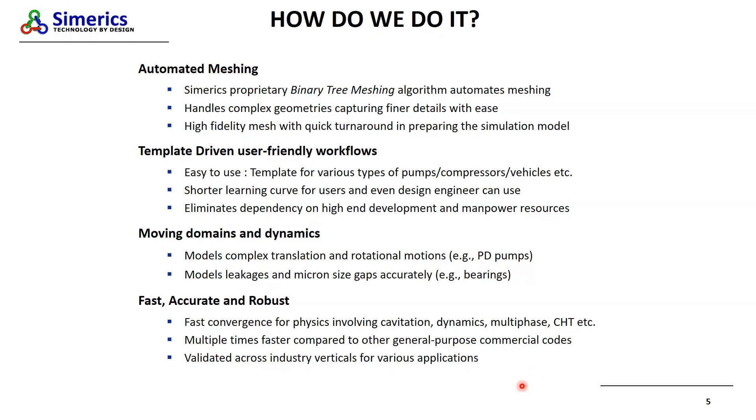On top of that, we have a fast, robust, and accurate solver. It helps in fast conservation and convergence of physics in complex physics like cavitation, multiphase, or conjugate heat transfer. This makes us multiple times faster than other general purpose CFD codes. We have also validated our tool across various different applications, which is something we will be showcasing today in our case studies.

So regarding our software suite, we have three different software suites that we are currently developing. The Simerics CFD has been a platform that has been there for a while now. The FEA platform is relatively new. We've been working on this the last several years, and we have come up with a platform that is now ready to be used. And also there is an optimization platform that is also coming up in the next release that is going to be an inbuilt in-house optimizer that is strongly coupled with our CFD software.

So we have multiple collaborations, and since the software is being utilized widely, we have been working together to make it work in those platforms as well. So now let's talk about Simerics CFD for multiphase VOF. I think volume of fluid has been there for a long time, but the commercial use of volume of fluid to track the different phases has recently been utilized in a very wide variety of applications to get commercial value.

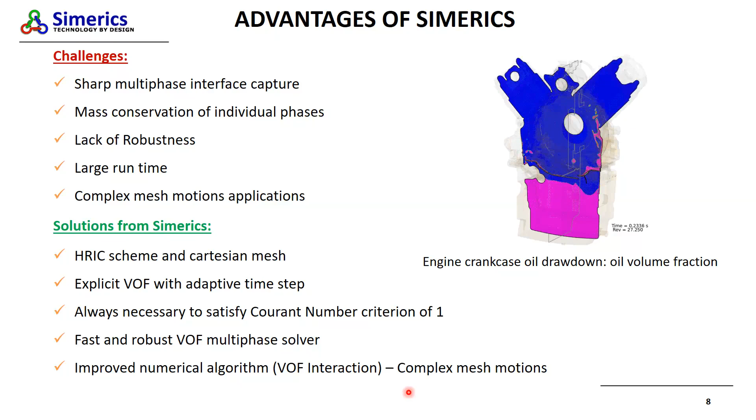This is something that some of our users have a lot of happiness involved using our software. We see that it rarely has any trouble with convergence if they follow the set of practices that we have developed and help them implement. And also for complex motions, we have improved our numerical algorithms to ensure that we can address this without any of the above being compromised.

So I'll briefly describe each one with an example. So the first one is multiphase interface capturing. So you're looking at an example of an electric motor where your shaft is spinning at very high speeds, can be about 10,000 to 20,000 RPM. And you are inputting flow, which is very low, let's say 1 to 2 LPM. And then it comes out and forms like a free stream and goes and splashes on this end ring surface. So this is a very tough combination for VOF because you have very small amount of flow coming at very high speed out of a very thin hole.

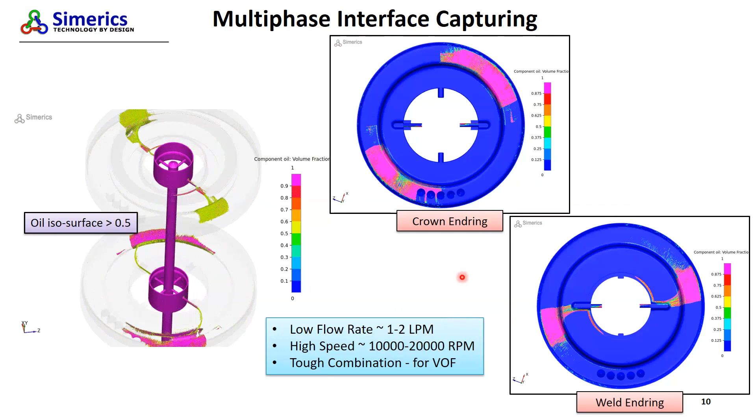And you can see the interface that we capture here is extremely sharp between the oil and the air. So it shows that a tough engineering problem in the real world can still be addressed using a software with a very reasonable time frame.

The next example is for the explicit VOF with the sub-time step. You're looking at a coolant system filling scenario. Here it's a vacuum fill process. So what it involves is initially evacuate the system to 90 kPa below atmospheric pressure, and then you're filling in coolant at atmospheric pressure at the top boundary. So initially there is a huge pressure gradient of 90 kPa that creates a velocity in the order of 200 meters per second. So there's high velocity at the beginning. And then as the system starts to fill, the velocity starts to reduce.

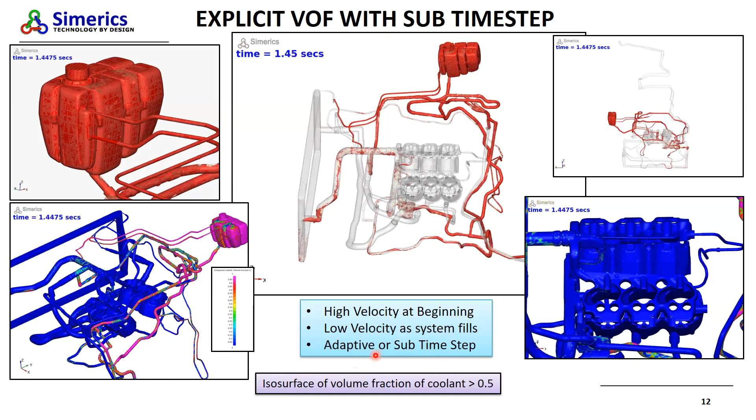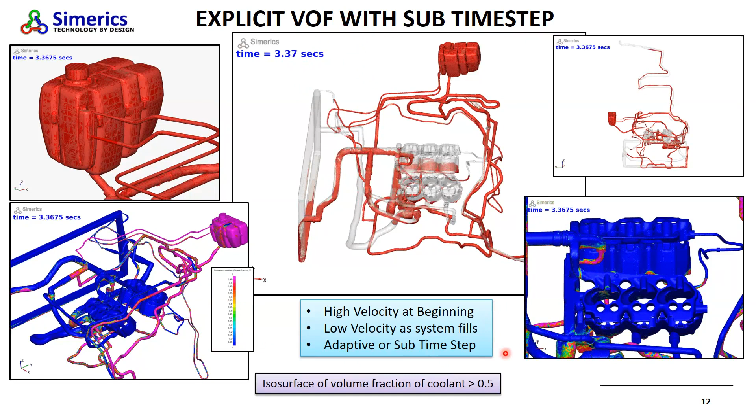In this process, you don't want to sit and manually input different time steps as you run the simulation. So we use our explicit solver with internal sub-time stepping. So it does an adaptive time step to ensure your time step is changed as a function of your Courant number. And this ensures that the interface that we capture, as you see here, between the coolant and the air is very sharp. And also you notice here that we have been running this simulation for quite a long time. We run this typically 15-20 seconds. And in order to run this within a very fast runtime, this explicit sub-time stepping can accelerate this process very fast to get results.

So the next aspect of it is conservation of individual phases. So here the coolant is a constant density, whereas the air is ideal gas law. So when it's done filling, you should get to 90% fill because this is just based on the conservation of mass. So we see that the integrated mass error that we get is within 4% after we run this for 15 seconds. And you can see that the volume starts to saturate after you run this for a while. So this kind of shows how good we can conserve mass, even though we run this for a long time and do this aggressively.

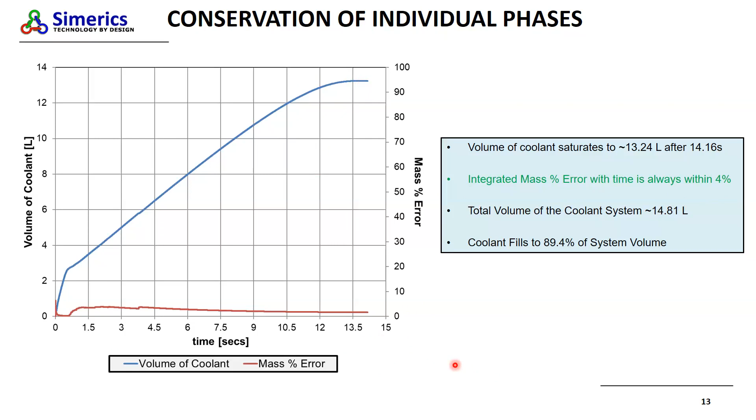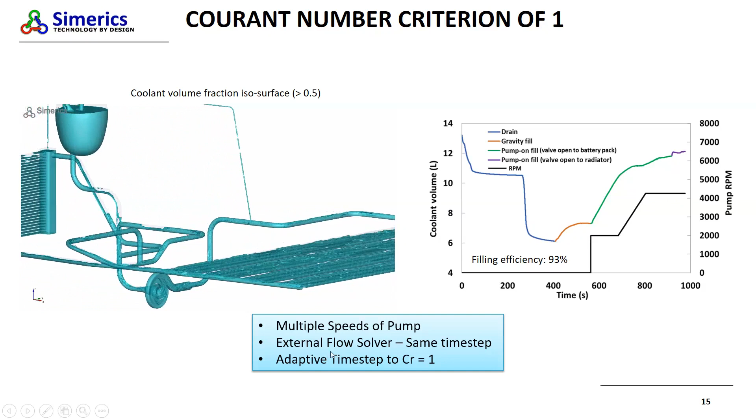So the next advantage I want to talk about is the necessity of the Courant number being 1 always being satisfied. So here you're looking at an example of coolant system fill as well, but here it's the pump-on filling. So when you run this case, initially you gravity fill it, and then you start to spin the pump. And you can see the curve here showing the different pump speeds. So you can have multiple pump speeds. Initially we start at 2000, then we ramp it up to 4000 odd and stay at that number. During these multiple speeds of the pump, we control only the external flow solver, which uses the same time step. And our adaptive time step makes sure that the Courant number 1 criteria is always satisfied. And this is automatically done by the solver.

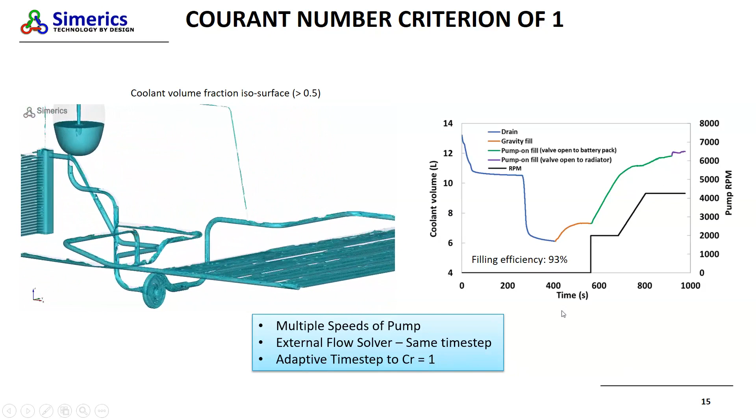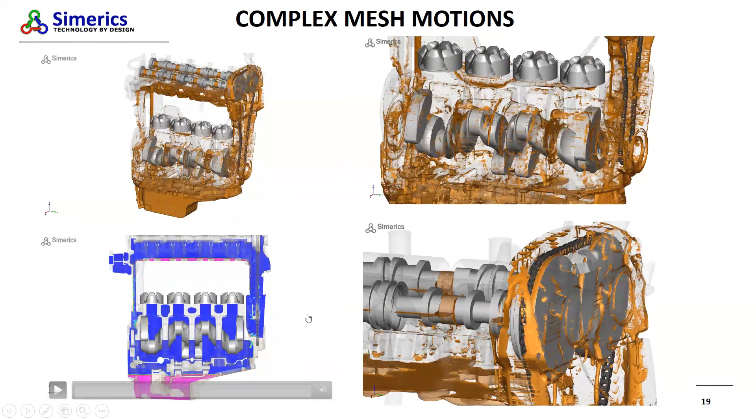And this is what ensures that our interface capturing is sharp while our mass is conserved. And the final part of it is complex mesh motion. This is an example of a crankcase drawdown model. So the piston's moving as well as the crankshaft rotating. On top of it, we have a chain that is also moving. So all this is being modeled with oil and air physics, and the rotation speed being quite high. And we can do this very effectively using our VOF tool. I'll be showing this case study a little bit more in detail later on.

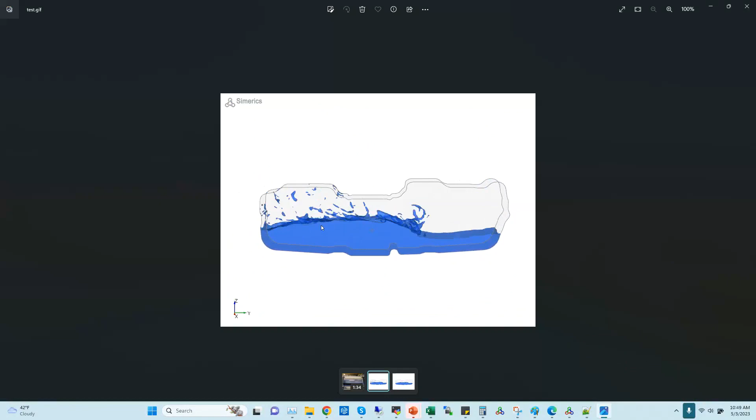Thanks, Chirant. Today, I'm going to go over how to set up a tank sloshing model in Simerics. Before we get into it, I wanted to give you an overview of the model we are going to set up. As you can see on the screen, this is the model of a tank, which is partially filled with water and the rest of it is filled with air. We are going to be displacing this tank with an oscillating motion along the y direction. The idea is to predict the flow patterns and to study the sloshing inside of the tank. So let's get into it.

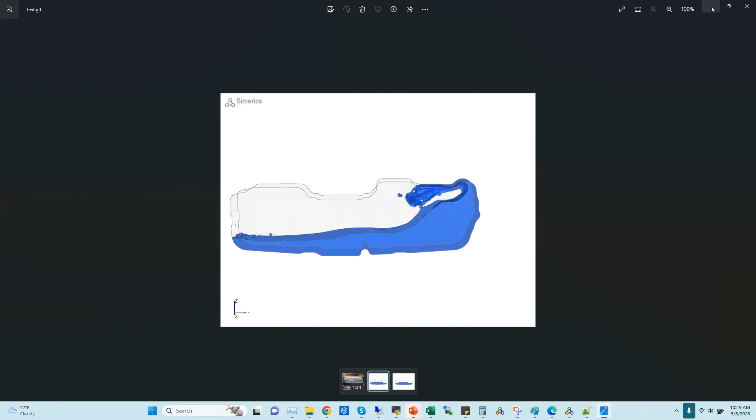To begin with, what I have here are the CAD surfaces of the tank, which you can bring in from any CAD package in STL format. To get a sense of the dimensions of the tank, along the y direction, which is the biggest dimension here, it's about 0.9 meters in length. In the x direction, which is the thickness direction, it's about 0.1 meters. So fairly typical of a fuel tank inside of our automotive vehicles.

To begin the model setup, the first step is to generate the mesh. We go into our general mesher, and then we are going to add these surfaces. We're going to use a relatively coarser mesh size for today's demonstration purposes, but at the same time, something that will give us fairly reasonable results. Then we generate the mesh, and in a jiffy, you can see that the mesh has been generated. We're going to do a quick inspection of the mesh to make sure everything looks good.

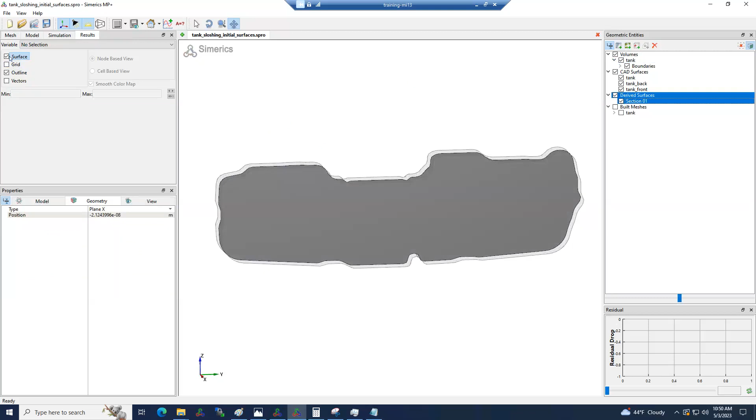And we'll double check the cross section. So it's a fairly reasonable mesh. The total cell count is about 134,000, so a really small model compared to the size of models that we run these days.

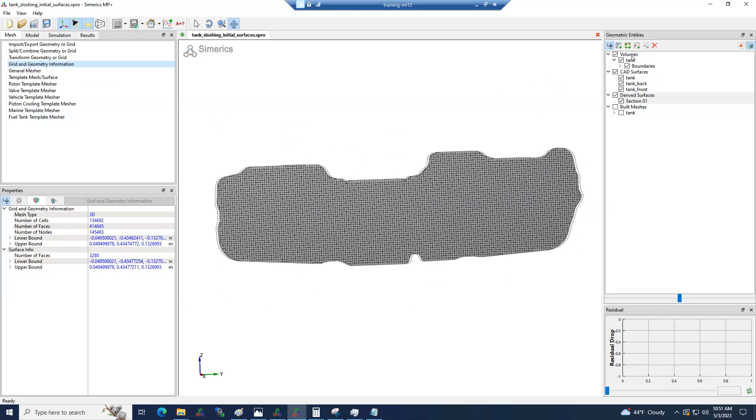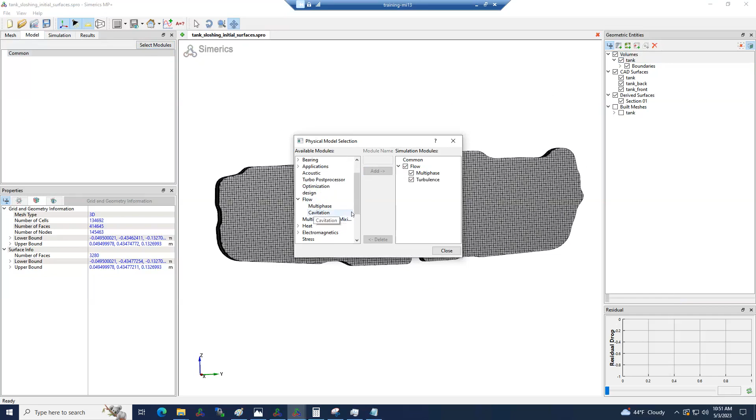Once we have the mesh generated, the next step is to assign the physics modules that we need to solve for in this simulation. This is a classic multiphase VOF problem where we have two fluids sloshing. So I'm going to include the multiphase VOF solver. I'm also going to add the turbulence model to account for all the turbulence that occurs due to the sloshing. And with that, we are good with the flow physics.

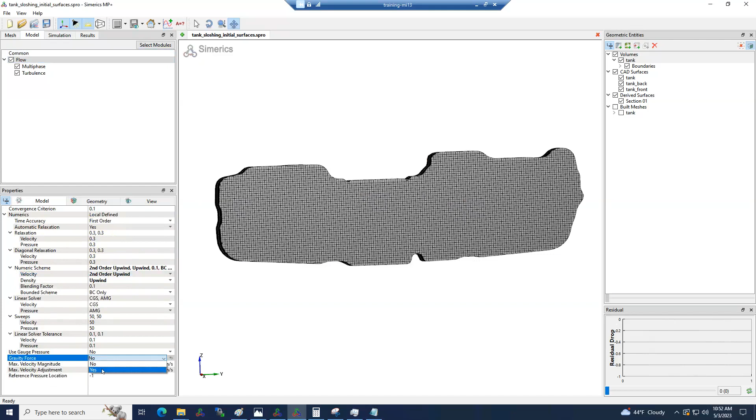Quickly, we are going to set up the numerics for this flow module. Our best practice is to use second order upwind for the numeric scheme for better accuracy. We also want to include the effect of gravity, so I'm going to turn the gravity force on, which is going to be downward, so minus Z, and specify a value of 9.81.

Next, I'll move on to the multiphase module. By default, Simerics adds two components to the multiphase model. I'm going to rename this to air, and the second fluid is going to be water. We are going to use the default settings in our multiphase solver. We use the explicit scheme, with the Courant number set to 1, and we use the adaptive Courant number method where we cut off the maximum Courant number at 10.

Next we'll go on to the turbulence model. For the turbulence model, we use pretty much all the default settings. I would just change the convergence criteria to 1, because we are mainly interested in solving the flow parameters to converge. Turbulence usually does not play such a big role in convergence.

Having done that, the next step is to assign the material properties. We select the tank volume, and over here in the properties panel, I'm going to assign the air properties. In this case, it's going to be a constant density of 1.23 kg per meter cubed. And for the water, I'm going to assign a density of 998.2.

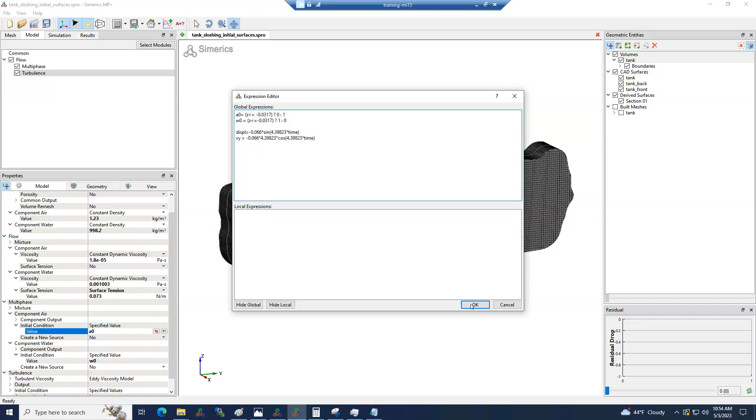So it's a fairly simple expression which just defines a Z coordinate: below this level it's going to be water, and above that level it's going to be air. So it's a fairly simple expression here. And after initializing the domain, we are pretty much set with our volume conditions or assigning the material properties. Next, we need to assign the motion of the tank.

So to do that, we are going to use this volume remesh option, and we are going to use the translation option, and we're going to provide a displacement to this tank, which is specified by this variable here, which is nothing but a very simple expression again, just a sine function with a certain amplitude and a frequency. So it is a function of time. So it's a reciprocating motion. It will move from left to right and so forth.

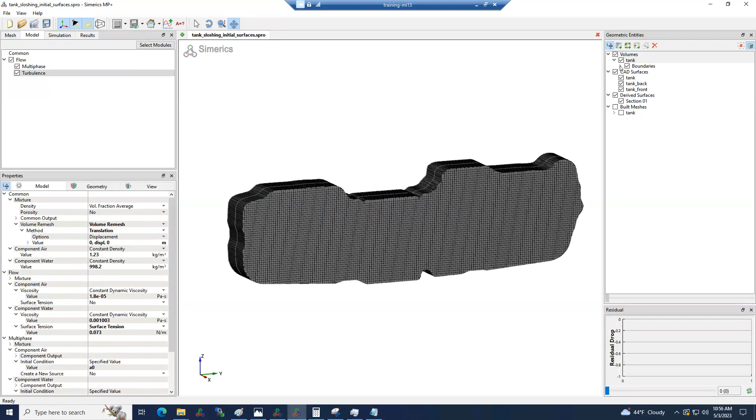And also, this volume remesh only takes care of the mesh motion. We still need to provide the actual velocities on the wall so that we can account for the shearing effect on the fluid. So to do that, we select the boundaries, and in this wall boundary condition, we're going to change the stationary wall and specify a Cartesian velocity on this wall. So we're going to assign a velocity of Vy, which again is nothing but the differentiation of this displacement so that we get the velocity. Again, a fairly simple expression.

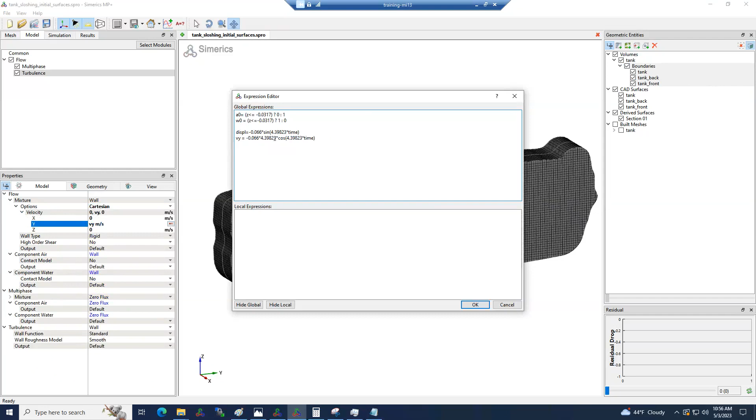Having done this, lastly, we just want to enable some outputs. So I normally like to enable most of these integrated values. It just helps us to give more insight into our simulation. And also, it helps us to cross-check to make sure everything makes sense. So I'll just enable some common outputs, which will also help us check for the masses of different components inside of our domain.

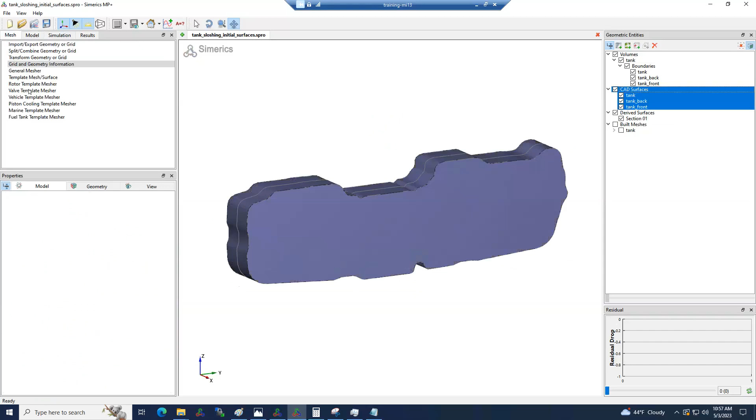All right. I think with that, we have pretty much set up the model. So just to quickly summarize, we started with the CAD surfaces. We generated our mesh using the general mesher option, and then we added all the physics modules that we want to solve for. We define the two fluids that we are solving for. And then we assign the material properties for the two fluids, which includes the density, viscosity, surface tension, and also the initialization of our domain. And lastly, we assign the velocities. And next, we are ready to run the simulation.

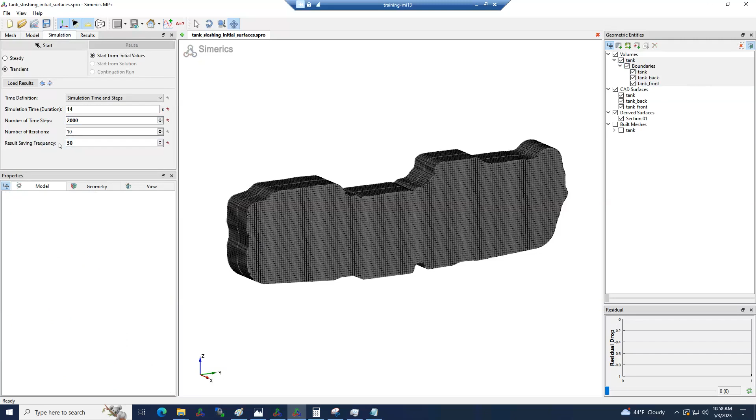So this is going to be a transient simulation. We are going to run it for 14 seconds with a total number of time steps of 2000. And number of iterations per time step, we're going to leave it at 10. And we're going to save the results every 50 time steps so that we can create an animation. And before we run, let's quickly save this project. I'm going to save it with today's date, May 3rd, and we are ready to run the simulation.

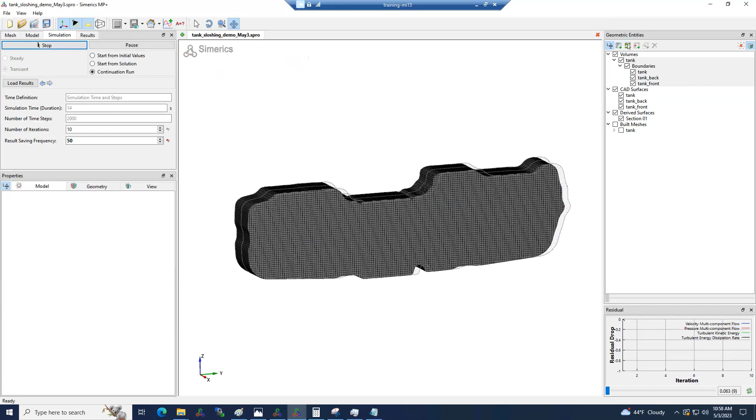So you can see that the simulation has already started running, and I'm going to quickly create an ISO surface to see the volume fraction of water. All right. I'm going to hide the CAD surfaces here. And then let me give a realistic color to the water, and then add some transparency so that it looks better. We can see through it. Maybe I can plot the pressure on it.

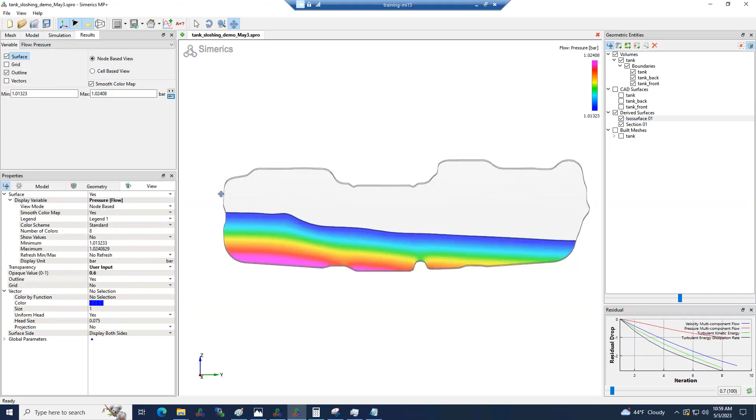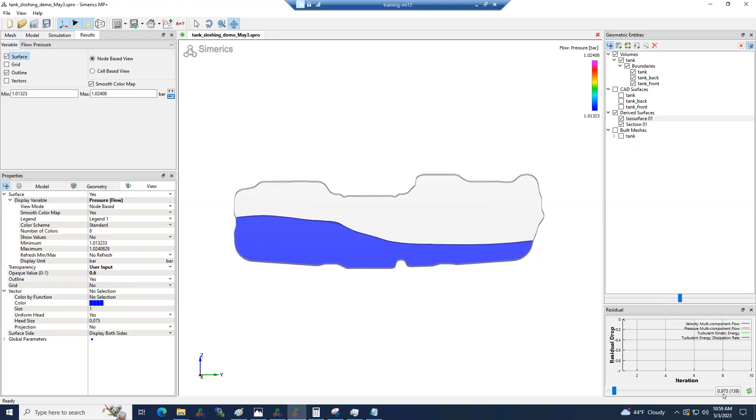All right. So I'm just going to leave my cursor here. You can see the tank moving to the right. And as the tank moves to the right, you can see the water sloshing to the left. So this model can run really fast. I'm running on a desktop with 32 cores, and it runs really, really fast. So in about a minute, it completed 1 second of the simulation, and we just need to run 14 seconds. So it takes about 14 minutes to run.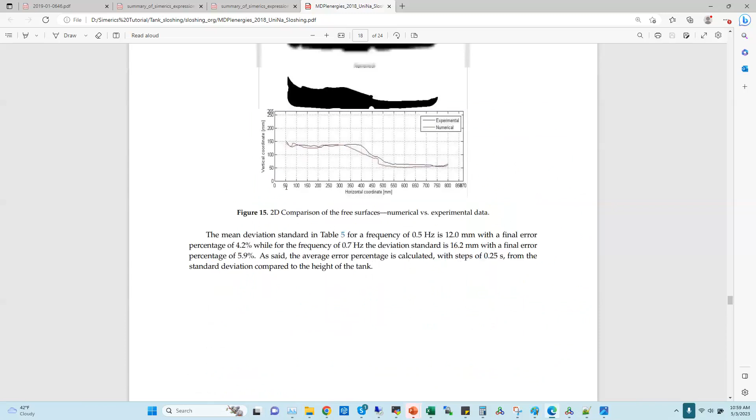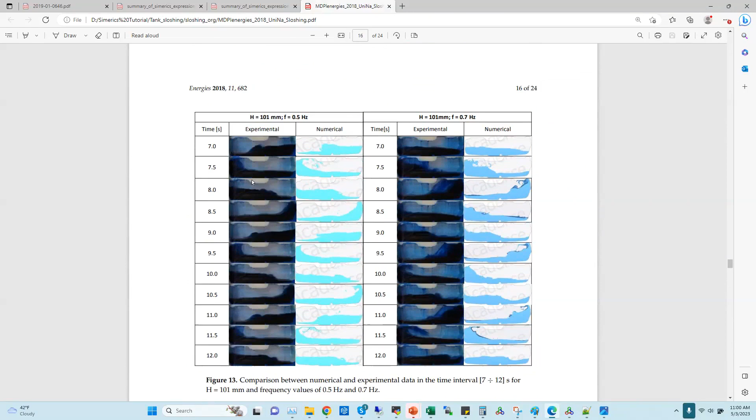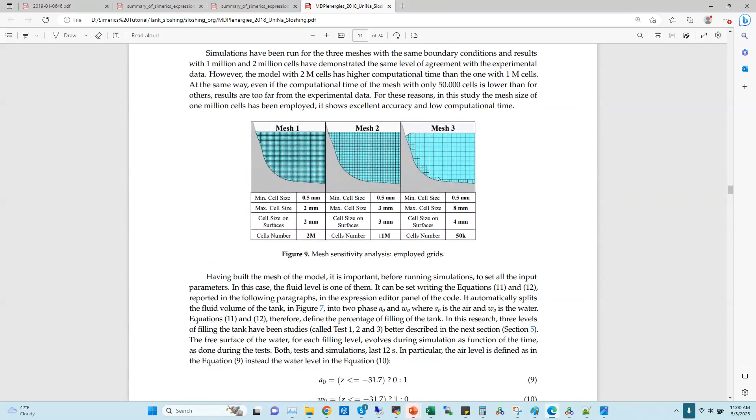So while the simulation is running, I quickly want to go through some validations that we have for this particular model. This is actually a paper written by the folks at University of Naples in Italy, in collaboration with Fiat Chrysler Automobiles in 2018. So they actually had a test bed that looks exactly like the model we set up here. And of course, for that model, they used a relatively finer mesh, but still the total cell count was about 1 million. And they did some comparisons for this model. So I'll quickly go through these images here.

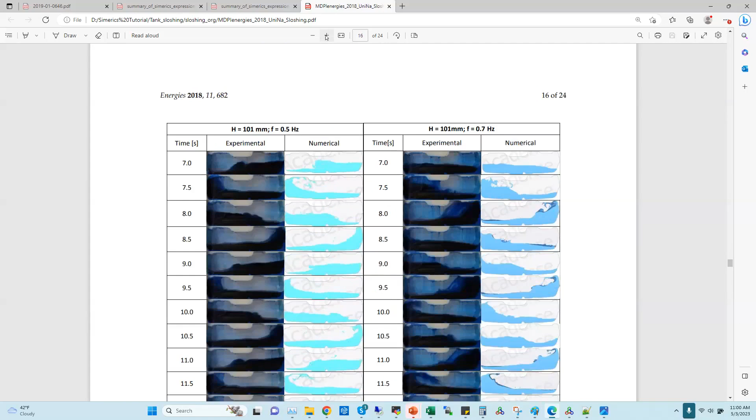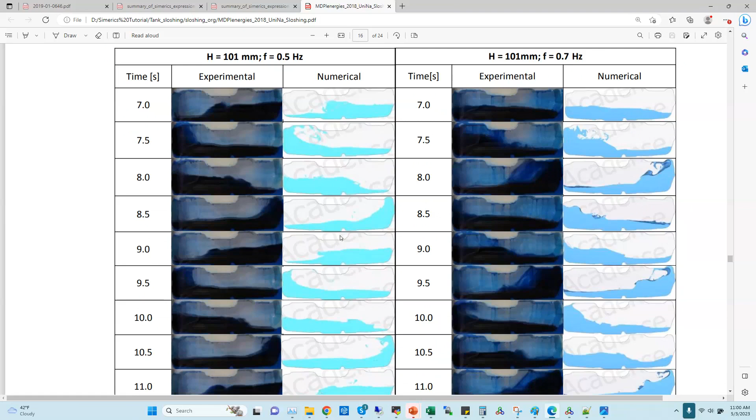And over here, they're comparing the ISO surface of water at different instances of time, and compare that with the experiment. So as you can see, at different intervals of time, when the water sloshes from right to left in all the different scenarios, the ISO surface matches pretty well to the image from the test, right? This is some pretty significant sloshing, and we capture these patterns pretty well.

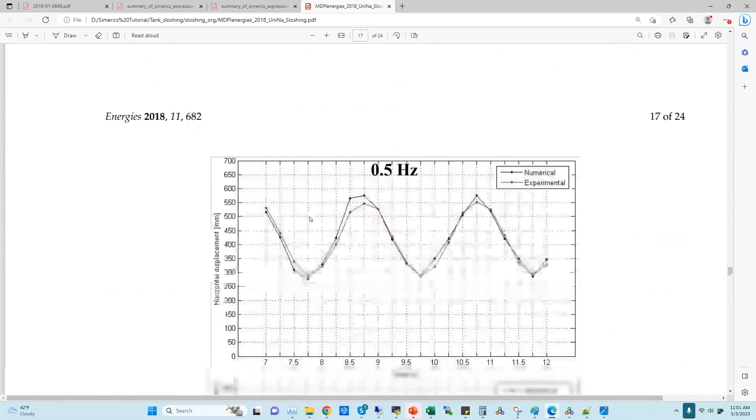And in addition to this, they also did some quantitative comparisons where they measured the center of gravity of the fuel tank, and they compare it with the experiments. And you can see that the two curves basically line up pretty well. We get pretty close agreement between the experiment and the simulation. And all of this simulation was done inside of Simerics.

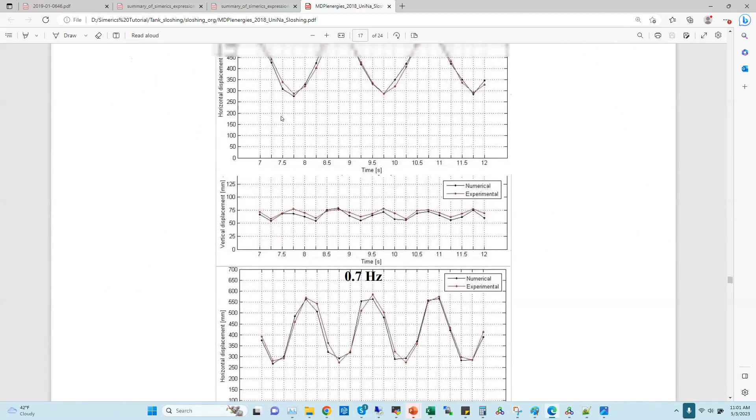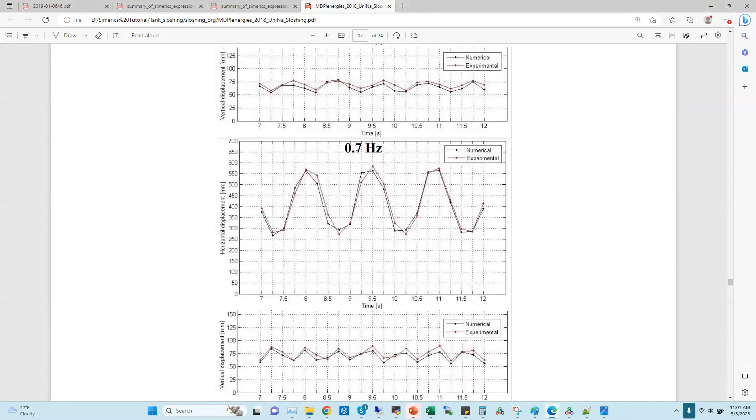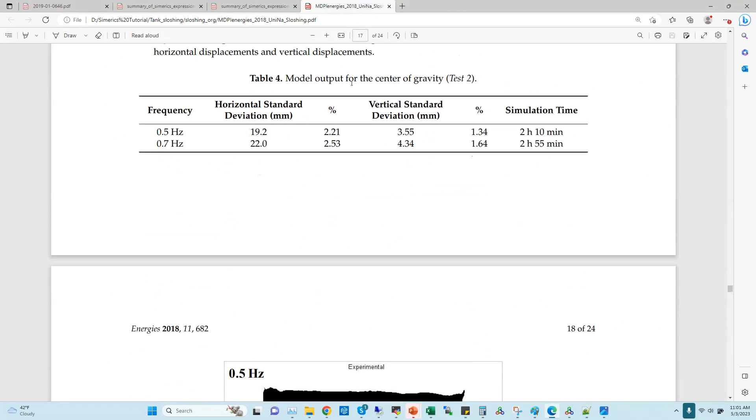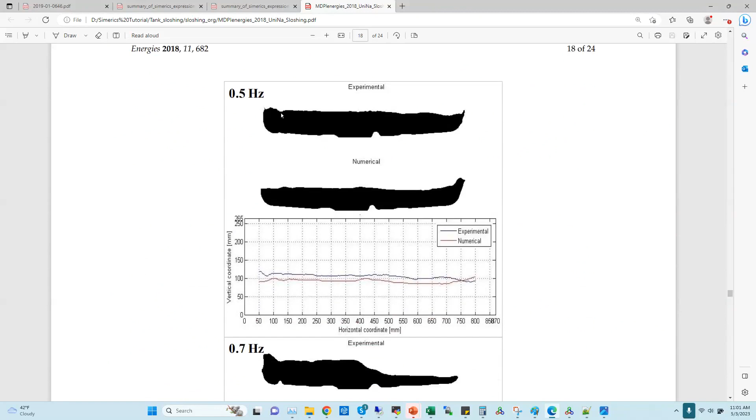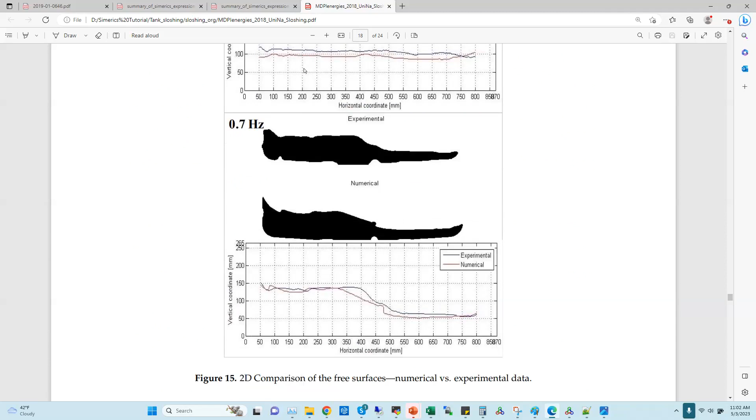And in addition to this, we also compared the free surface of the fluid. So we just extract the top free surface curve and plot them for the experimental versus the numerical result. And again, the two curves were quantified by outputting the standard deviation, and the error was within 4.2%.

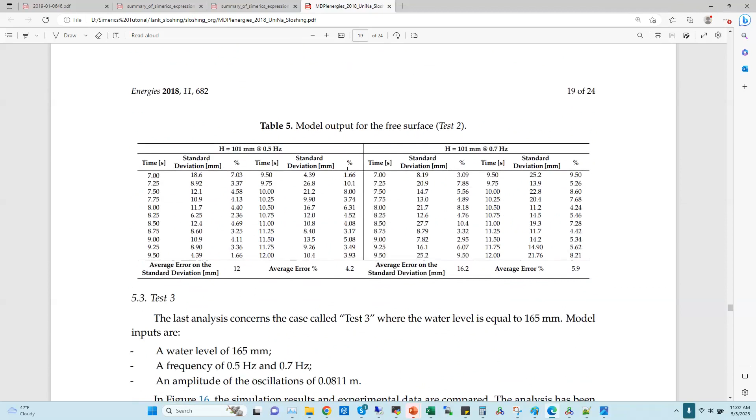So we get pretty good agreement even for such a small model, and it runs really, really quickly. They ran the simulation in like 2 hours. So we are able to produce really good results in a really fast time. All right. Yeah, I think that completes this demo.

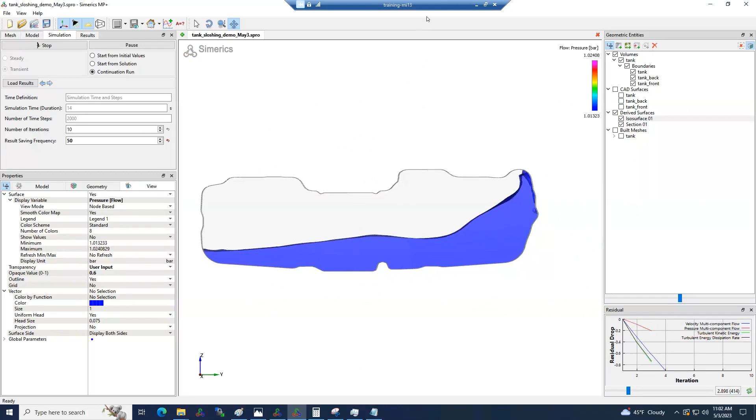I will hand it back to Chirant. Yeah, thank you, Varun. Let me share. So thank you, Varun, for that nice demo.

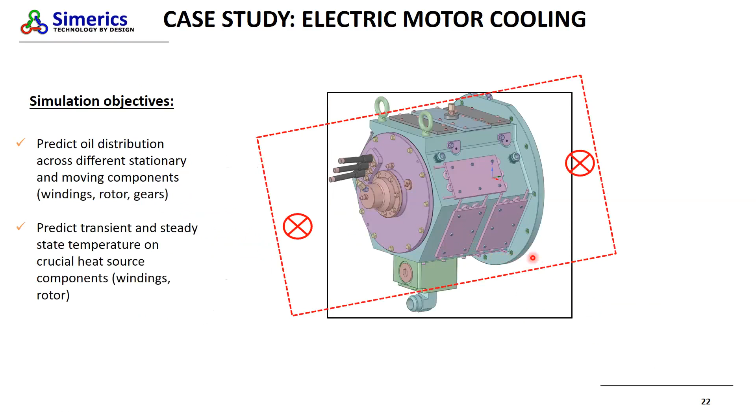So now we talk about the engineering benefits of using the volume of fluid approach in studying real world applications. So the first one is the electric motor cooling. So this is a work that we collaborated with General Motors, and they were kind enough to share some data so that we can do the study. So we worked with them to do this study with the GM research.

So the objectives here were to predict the oil distribution across the different stationary and moving components, the windings, the rotors, and then look at the transient and steady state temperatures on the different components, mainly the windings and also the rotor and stator laminates. I think the electric motor model nowadays, everybody has a good amount of familiarity with it. So these are the different components that you are looking at. The main components to be highlighted are the windings, the end rings, the stator and the rotor laminates.

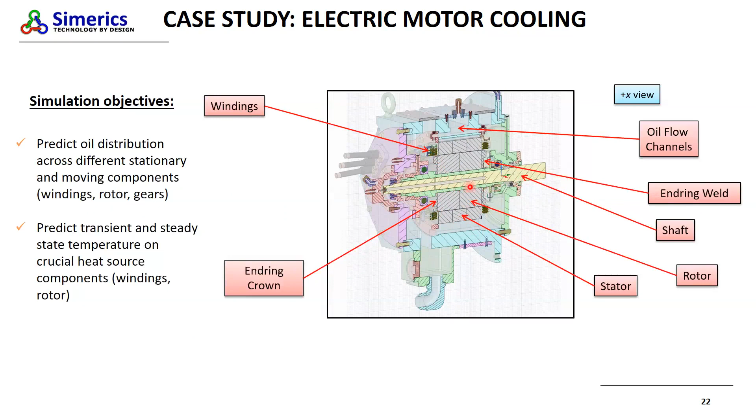So you have a shaft, which typically also has oil coming through there. So we'll describe a little bit about the flow here. So you have a rotor flow inlet. The flow comes in through the center hole in the shaft, and it takes a path that turns 90 degrees because they have drilled holes on the left side and the right side. So they have the weld side and the crown side. And you can see that the space all within this cylindrical domain is spinning. So those are all the rotating components here.

And so what will happen is the flow comes out and it splashes on this surface. So there'll be some heating that is happening on the inside. The rotor gets hotter, the magnets inside get hotter. So all that heat typically will conduct through these solid surfaces and gets cooled by this oil that splashes on the surface. The same thing on this.

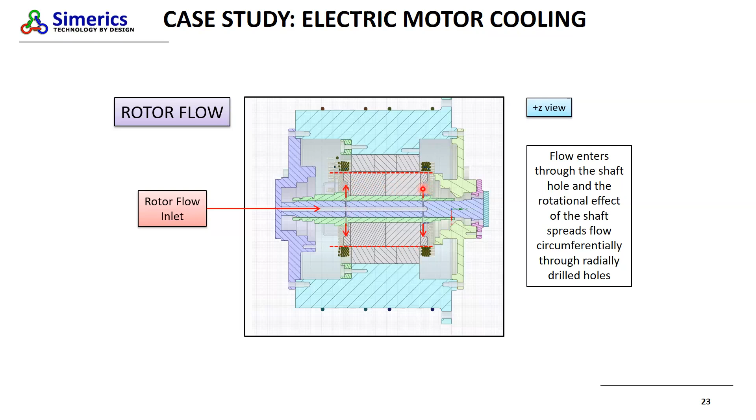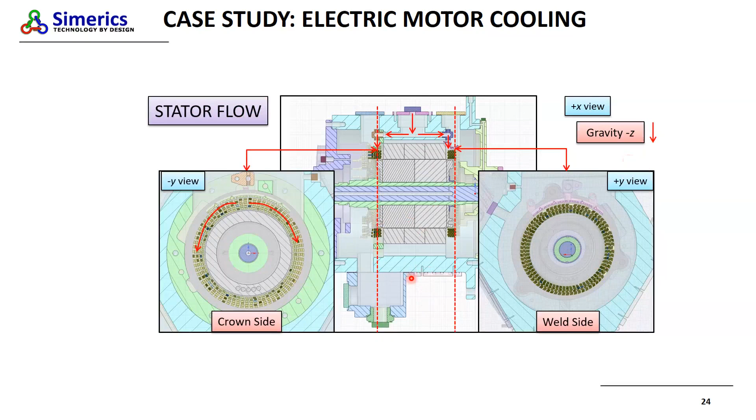And then if you look at the plus Y view, you have the weld side. Again, you have a baffle that makes sure there is a distributor that distributes the oil equally. The gravity, as you might logically expect, is acting top to bottom, in the negative Z direction. So this is an animation showing the oil distribution, 0 being air, 1 being oil. And you can see our interface that is getting captured as this oil comes through and goes to the crown side and to the weld side.

We even see that there is a phenomena where the oil comes in with too much velocity, which causes a jet that kind of siphons off some of the oil to the outside. These things I think CFD typically has a good perspective of visualizing, which could be hard to see or hard to expect in reality.

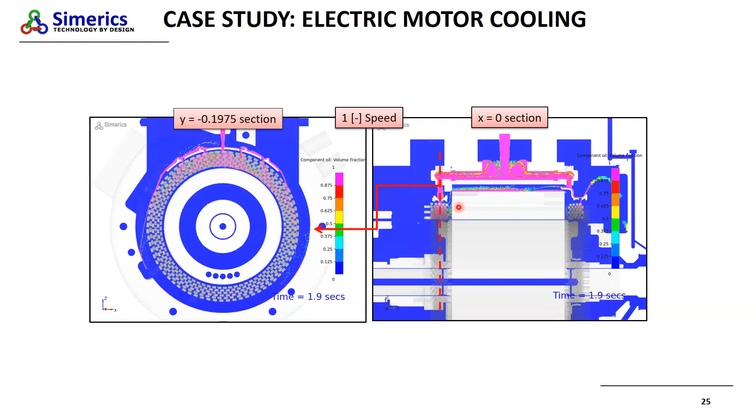Also, you see that the baffle that was designed here actually channels some of the oil that is coming through to the weld side back to the crown side, which is also interesting. So you would expect equal distribution, but some part of the oil travels back to the crown side, making it a little bit uneven, which is also something CFD can offer a perspective on.

The extra importance here is basically you have this electric motor that is having two different time scales, because you're looking at the solid heat transfer that happens over a very long time frame, while the fluid heat transfer happens over a much shorter time scale because the fluid flow is happening over a much shorter time scale.

So we need to come up with an algorithm that effectively couples these two processes such that you can proceed through the heat transfer process in a reasonable time frame. For that, we actually created an extra algorithm. We wrote that again from scratch, and this is a module that is now available in Simerics. It's called a data exchange module.

So what that does effectively is it transfers the HTC from the fluid with a reference temperature to the solid model. The solid model is run with a steady state formulation, and we get an update in the temperature, and we feed that temperature back to the fluid model as a boundary condition. And this process is done iteratively.

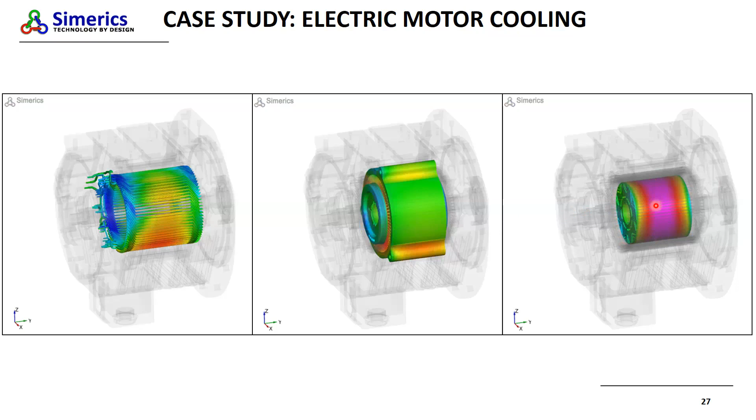So the next slide here describes a comparative plot that we got with the test or the experimental setup. They had thermocouples placed periodically on different portions of the windings, both on the crown side and the weld side, with about 24 total thermocouples.

If you compare individual points and characterize the difference between the test thermocouple temperature and the simulation thermocouple temperature, and do an RMS temperature difference, we are seeing our results to be within 9K of the test, which gives us a lot of confidence in the numerical fidelity with which we have captured our results.

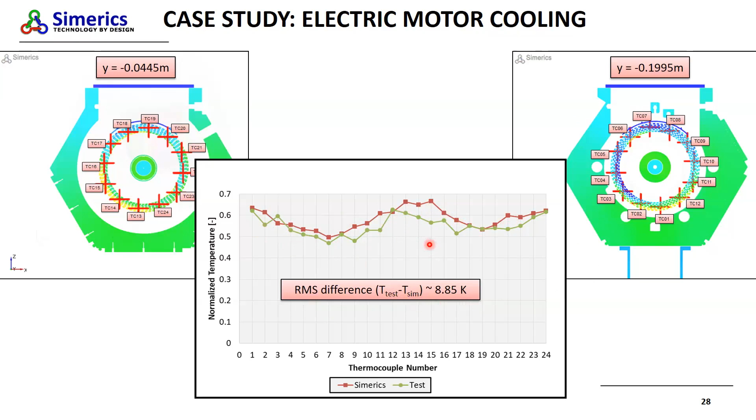So the next case study is crankcase drawdown and oil ejection. In this model, there are multiple interests. The model is very sophisticated, so I'll try to do justice by briefly describing this. So we have this full engine model.

You have the crankshaft that is spinning at a certain omega, and the pistons moving based on this omega. We also have the cam bearings, the main bearing, the rod bearings - all those have inflows. You can see here we have some inflows being prescribed in those, so we are also making sure that we spin the cam bearings.

Here what we are doing is picking up oil from this pickup tube, and we are imagining this oil going through this high pressure circuit and then coming back through these bearings as inlet to our domain. So the inlet to our domain is all these bearing inlets, and the outlet is the pickup tube outlet. So what we are doing essentially is taking out the flow that we are putting back in. At balance, the system will have the same amount of oil that we begin with.

Only thing is the oil will redistribute itself to different locations, and the motion of all the systems will dictate how much oil gets held up in different portions of the system and how much gets collected in the sump. We also have two open locations: one is this fresh air vent, open to atmospheric pressure, and the other is the PCV, which is also open to a different pressure.

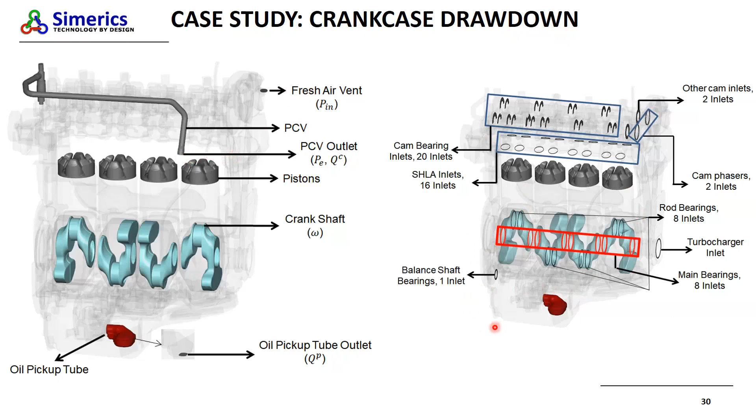So the animation kind of gives you a good feel for what this problem is. Here I'm showing two animations, one at 1000 RPM and one at 2800 RPM. So what you're seeing here is oil getting pulled up from, let's say, the pickup tube through to the pump, and then we are inputting it back to these bearings. You can see as the oil comes through these bearings, it creates a pool at the head.

So the head is kind of scooping and keeping some oil, and then as it saturates itself, you'll start to see the extra oil move down. Now how they design these channels is very crucial to how much oil is getting held up in the system and how much oil comes back down to the sump.

If you're running this engine at 4,000, 5,000, 6,000 RPM, you can start to create a lot of air oil mixture in the system. As you can see, from 1,000 to 2,800 RPM, there's a lot of mixture of oil moving around. At really high speeds, if the design is good, you will see that you are able to pull down the oil and feed it back to the sump.

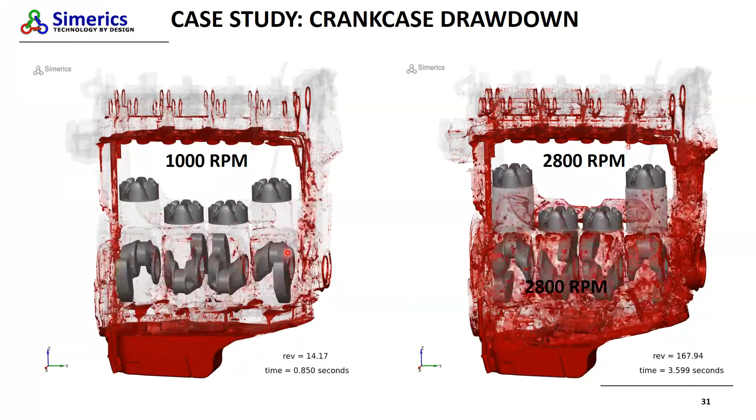But if your design is not appropriate enough, you will start to hold a lot of oil over, and that is where you will evacuate the sump out of oil, which is where the engine runs into trouble. So one of the objectives is to study what is the level balance of oil in the sump, and as a function of speed, is this something that Simerics can predict?

Also, the other part of the problem is you have a fresh air vent here, and as you try to crank the system, you will start to see some oil getting ejected through there. One extra objective is to see how much oil potentially is lost through that air vent, which can be higher at higher speed as well.

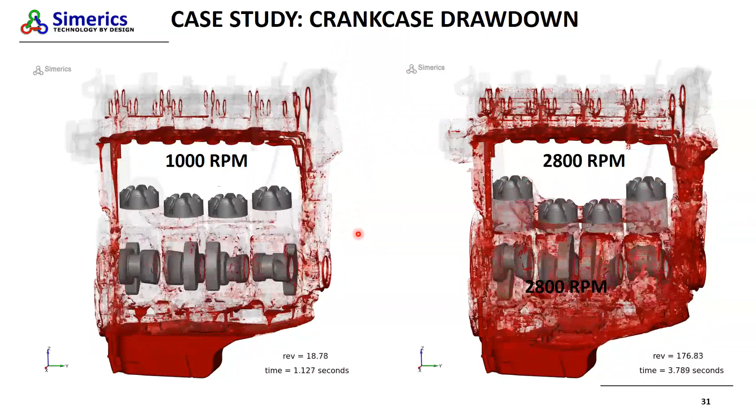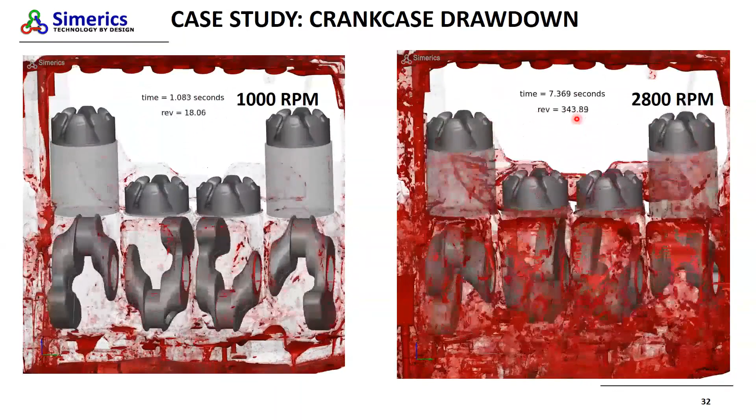I'll show a zoomed-in picture of the animation. It's a really nice looking animation, and I wanted you guys to visually appreciate what is going on. You can see we are running the simulation for a very long time in terms of CFD requirements—this is quite a long time, about 340 revolutions. And we still conserve phases excellently, without any large amount of numerical diffusion.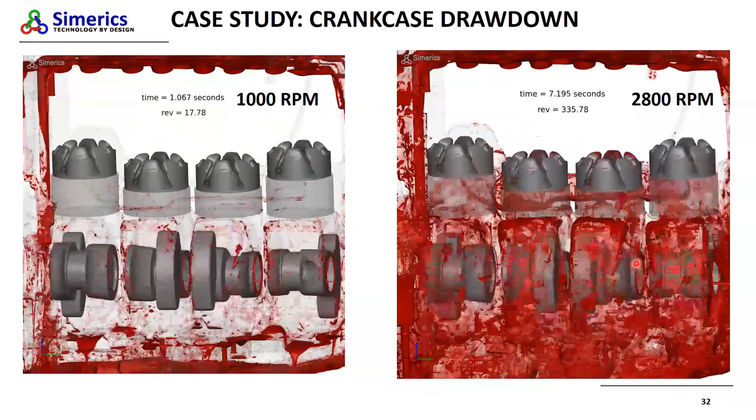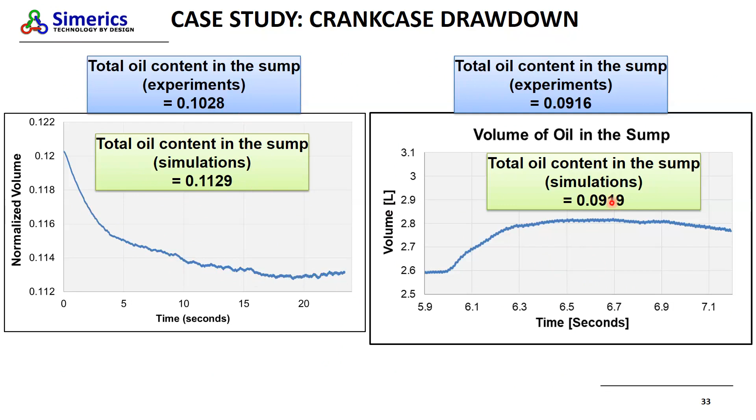You are seeing that we are at 0.09, and the test is about 0.09 as well.

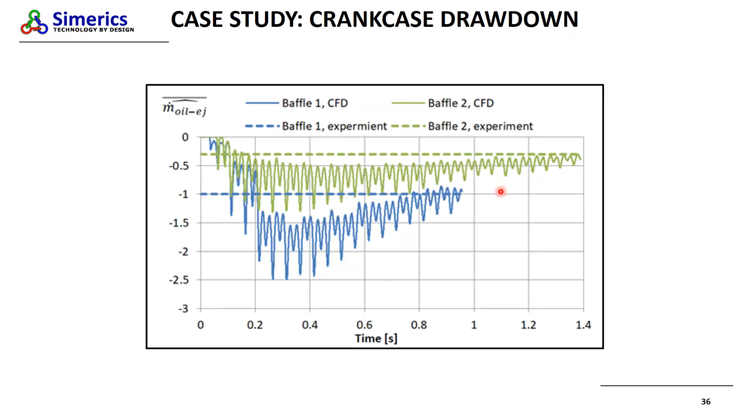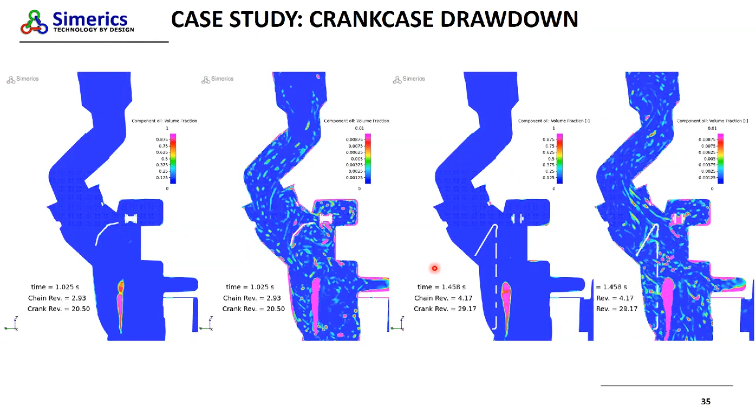So what I think these studies show is that our VOF capturing gives us a lot of confidence that in an engineering space, we will be able to do a good amount of justice in capturing the realistic nature of the physics while not being very expensive to model such complicated systems.

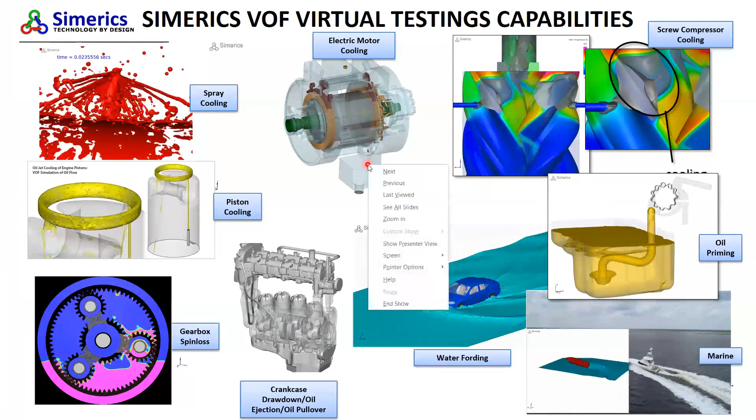I think right now we can do real gas. The phase change is something we still don't have the capability for, so that is something we'll need to develop. But with just wanting to use real gas, I think it should be fairly straightforward.

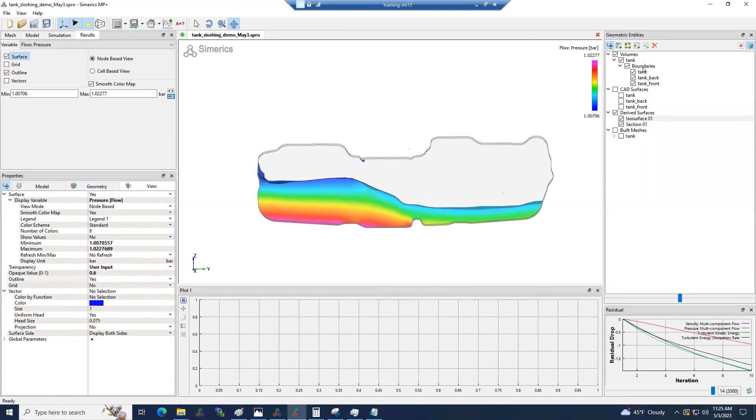Yeah, looks like the simulation is complete. It has completed 14 seconds. This is what the water level looks like at the end of 14 seconds. And I'm just overlaying the pressure on this ISO surface. We can also create some XY plots. Maybe we want to look at the pressure forces on the walls of the tank. So this is what the pressure force looks like.

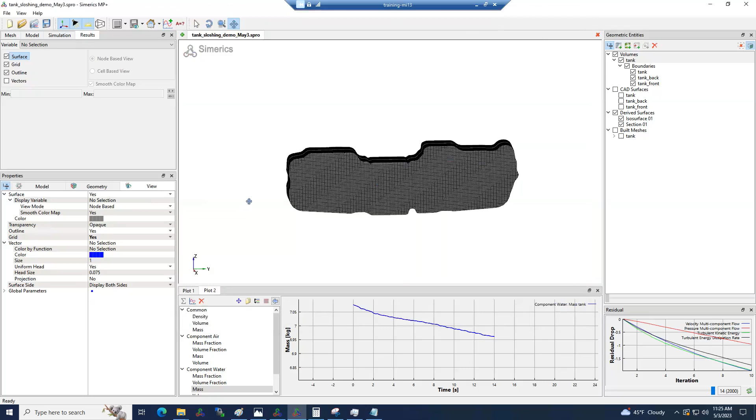We can also look at the mass balance. Since this is a closed system, basically the mass of water should be constant. Of course, we do have some slight mass imbalance. It's about how much? 0.1. That's still not too bad because it's 0.1 out of 7, right? So it's still 1.4%. So not too bad for such a coarse mesh and a coarse time step. So still within 2%.

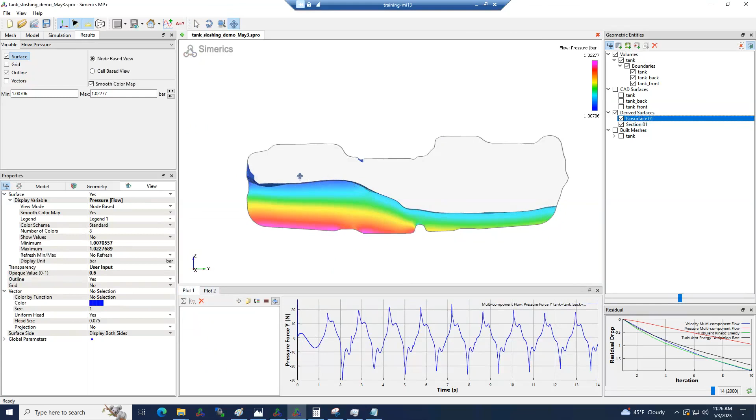Yeah. I think usually these are the parameters we look at, the forces, and of course we want to compare the free surface at different instances of time. So yeah, the post-processing in this model is very straightforward, but what we are seeing here is a tool where you can do everything internal to the tool.

Like I mentioned with the CAD integration, we have a preprocessor in different CAD kernels, and that will be something that will be added to the software by this year. So you can do a strong amount of pre-processing, then you can do the meshing that Varun showed, and then you can do the solution as well as the post-processing. And it's a full package that you can utilize very effectively for your simulation requirements.

I think this kind of shows how easy it is to set up a model, and it's not some cooked up model. It's actually a realistic tank model of a car, and we can get very good engineering results within a very short time frame. This model runs, like Varun said, 1 second within a minute. We can refine the mesh a little bit, but the runtime probably remains the same. So we run 14 seconds in 14 minutes, which is rapid basically.

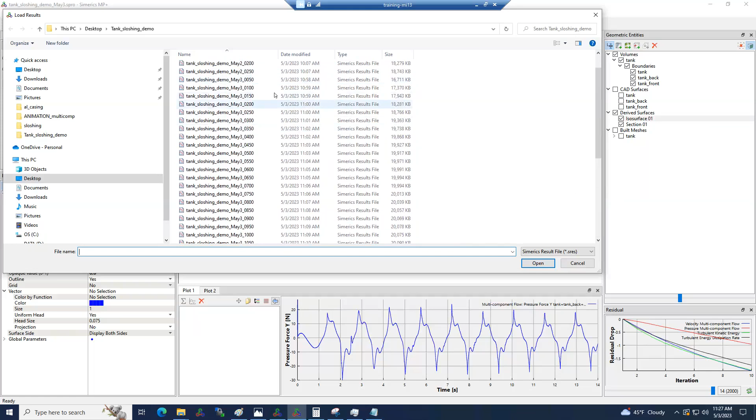And that is also an advantage that we want to take with our optimizer. So we can do multiple optimization studies within the same environment, rapidly one after the other, to find out the best design point, for example. So those are some ideas that I think are going to be utilized in the future to make the software even better.

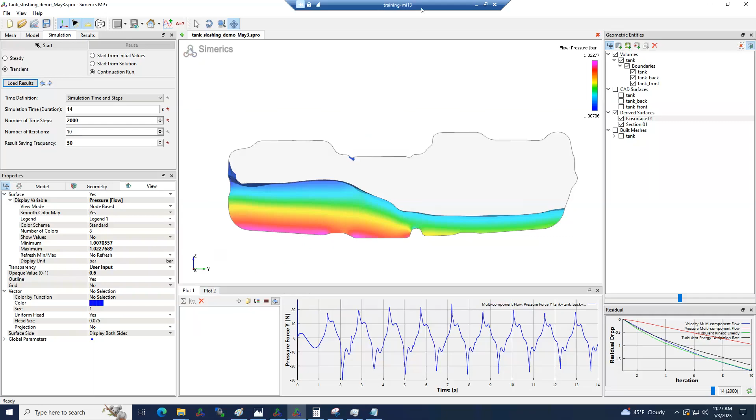Chiran, there's a question from Yashwant. He's asking, is there a module for spray modeling, spray breakup for the animation shown on the top left corner? We don't have a spray model. We are using the volume of fluid approach to do the spray modeling. It's something that we have devised using a swirl factor based on the jet velocity and the cone angle. So it is trying to capture the engineering effect of what a spray does to the cooling, because the cooling is of importance in that electric motor application.

So we don't have a Lagrangian spray model yet, but this is more like a VOF type spray, which does the job of capturing that behavior. Dikshit, if you can let me share again, maybe I'll just share the screen once more.

Okay, yeah, so this is what I think Yashwant was asking about, and this is what we have done. So three things were given to us. One was the velocity or the flow rate. We needed to know the cone angle, so that was also provided. They told us that it needs to be a solid cone where you have oil coming in the center and creating a spray pattern of 120-degree cone angle.

And we used those three criteria to create our own swirl factor to create this spray basically. It works really well. If interested, I can share this paper and show. So we wrote a UDF to do this essentially.